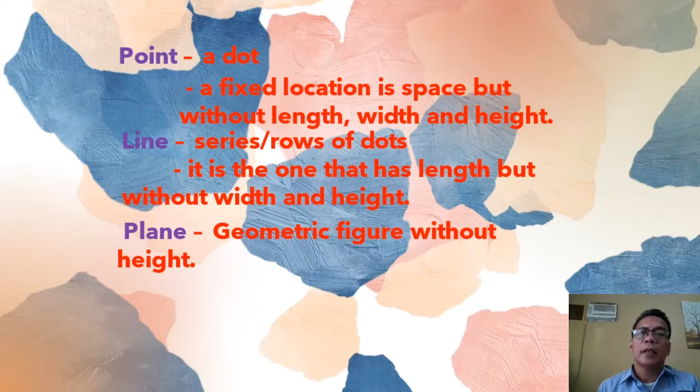What is a point? Point is a dot, as well as it is a fixed location in space but without length, width, and height. Line is a series of dots or rows of dots connecting to each other. It is the one that has length but without width and height. How is it related to plane? It is a geometric figure without height, meaning it has width and length.

So this is the first thing we will discuss today. I will show you the difference between the three in this next video.

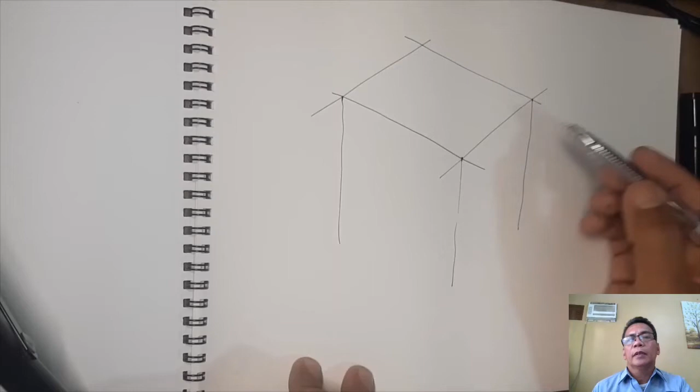So in sketching the isometric box, you need to sketch it using a thin line. Now, you would notice that I am sketching the top view first, then followed by the front view image of the box, and then the right side view. Now, the difference in sketching the technical drawing and the one used by an artist is...

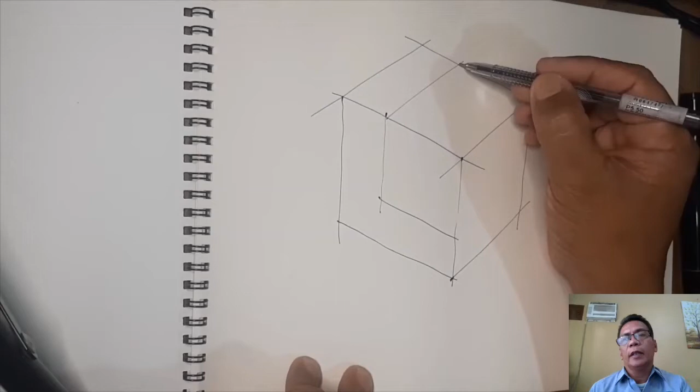In technical drawing, you need to draw a construction line. In artist sketching, the lines are repeatedly done, so it's entirely different. You would notice that I have used a thin line in constructing the object, and then after completing the image of the object, what comes next is the darkening of the visible edges.

I'm getting old. It's almost done.

So we have already come up with the image of the object represented by the heavy lines. So we have already finished the object.

So the next thing that we have to know is what are the dimensions of an object. Particularly, we need to understand that the object being visualized is a three-dimensional object.

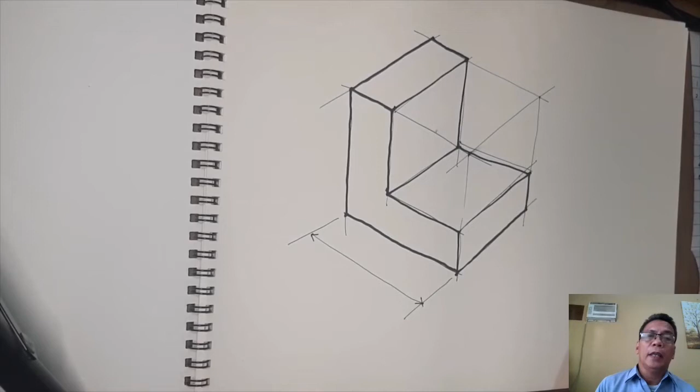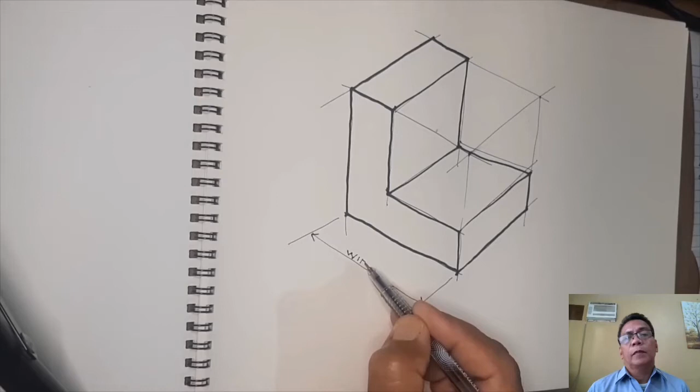So the first dimension of an object is what we call the width of the object. It is represented by W, and it is being measured from the left side to the right side of the object.

The next one is the length profile of the object. The length is being measured from the front view to the rear view.

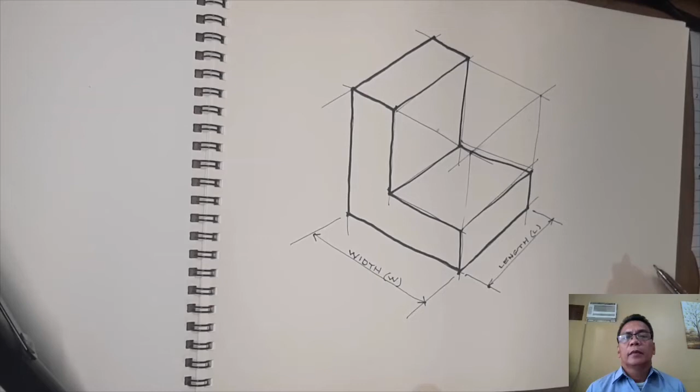The last one is the height of the object, which is being measured from top to bottom. So those are the three dimensions of the object.

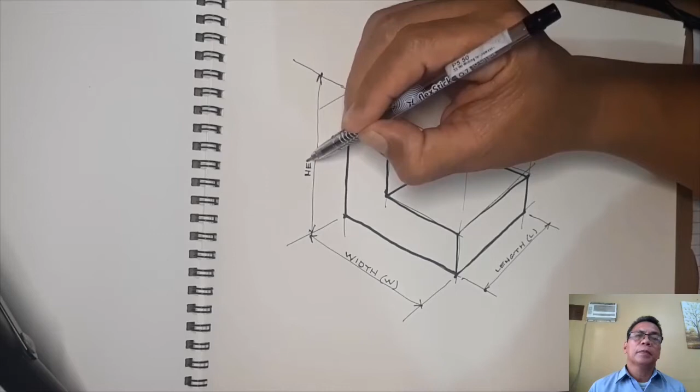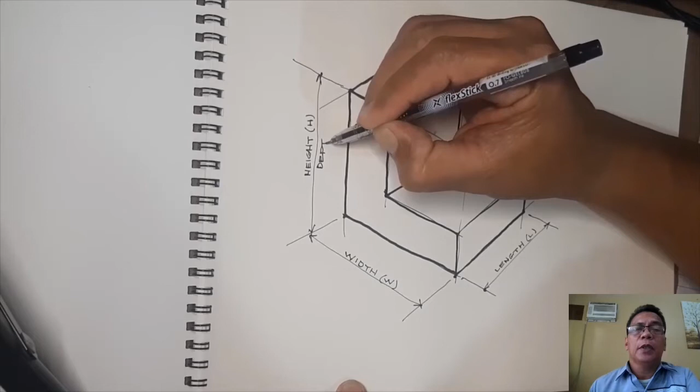Aside from being called height, it also refers to the depth of the object, or D. So we have completed the three dimensions of the object, namely the width or W, the length or L, and the depth or D.

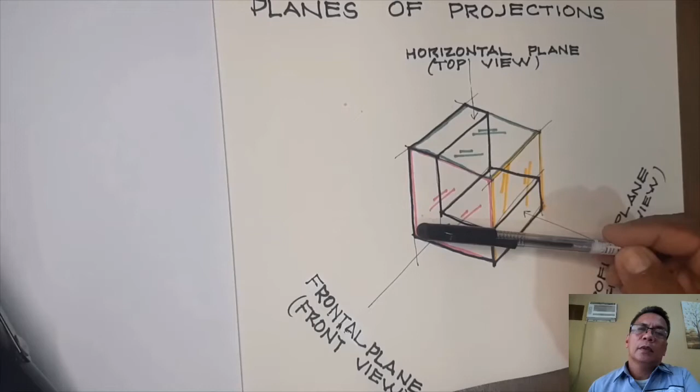So the next one is the planes of projection of the object. The horizontal plane happens to be the top view, and the frontal plane happens to be the front view of the object. So imaginarily, we have those three planes. Then the profile plane is the right side view.

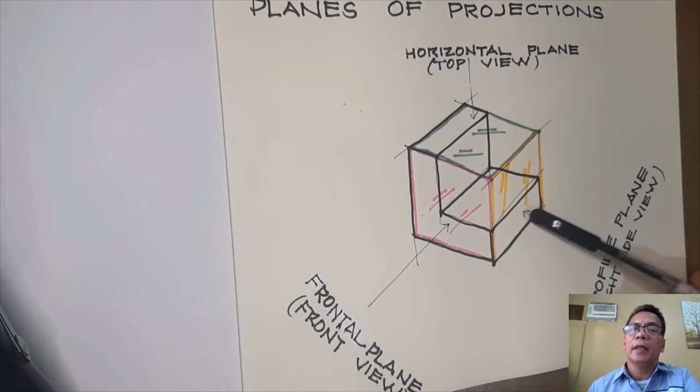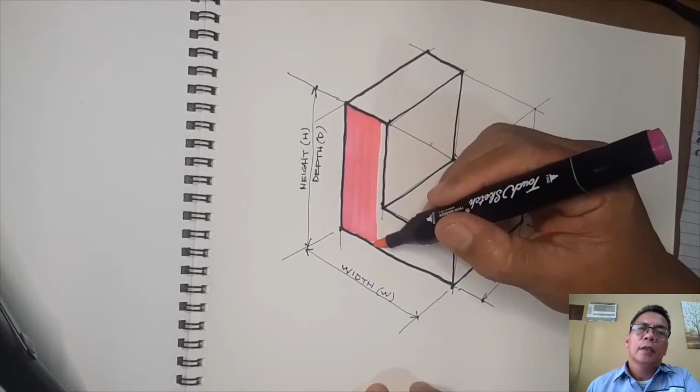Okay, so to identify which one is the top view, which one is the front view, and which one is the right side view, we are going to color the profiles of the object, beginning with the front view.

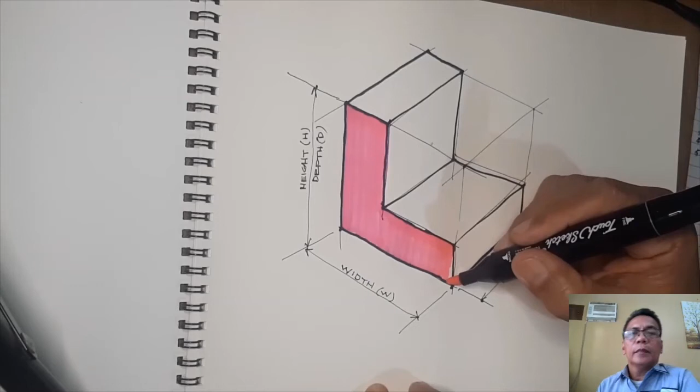So we colored the front image of the object pink, followed by coloring the top view of the object, or the horizontal plane.

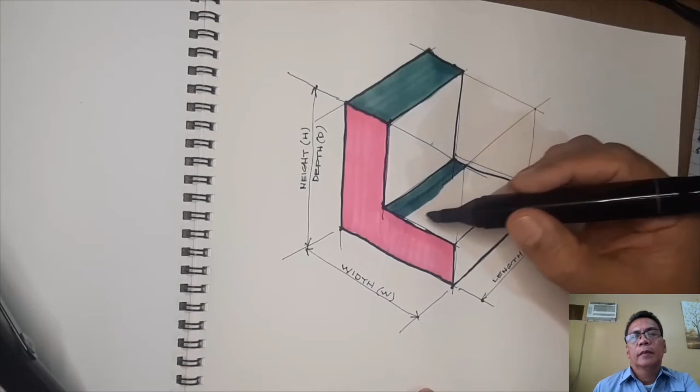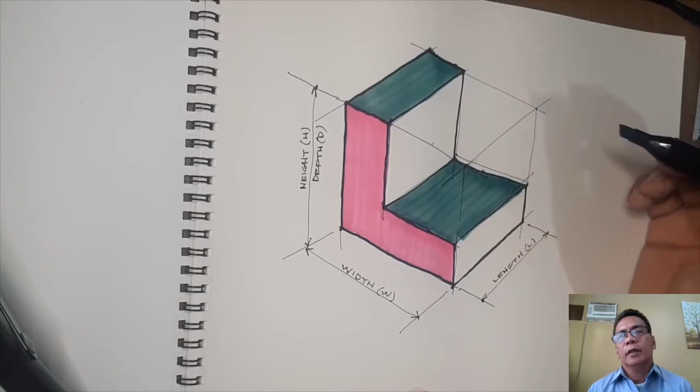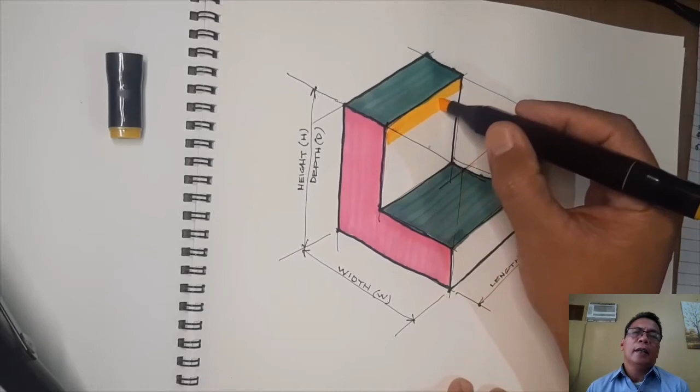So the reason why we need to understand this, why do I have to discuss this instead of mechanical drawing directly? Mechanical drawing is given only when you already know the image of the object and how to connect those different intersections. It is hard for a person to understand the difference between the point, the line, and the plane.

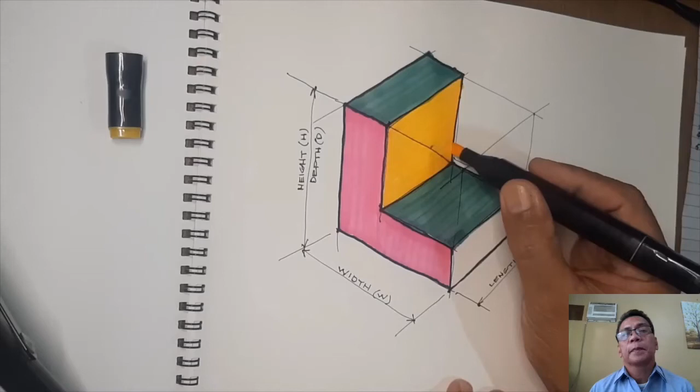So in this particular image, you would notice the angle of perception of an individual from three different planes of projection. We colored the front pink or red, the top green, and the last one, the right side view, yellow.

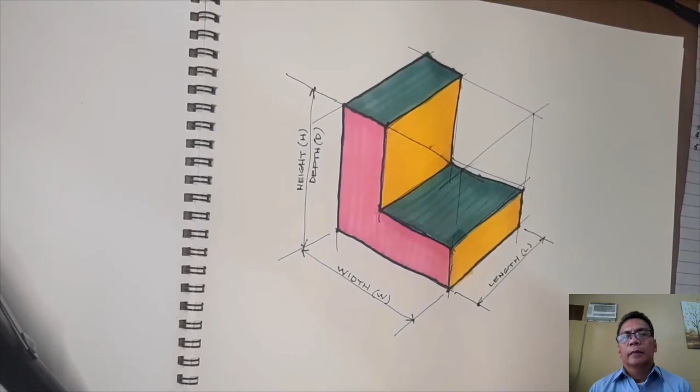Okay, so we have completed the dimensions of an object in color.

So appearing on the object, you would notice that the height, the width, and the length represent each view of the person observing it. So the width is only available on the front view and the top view.

The height of the object can only be visible on front, right side, and left side views. On the top view, you will see the length of the object and the width of the object, not the height. So there are different situations, different angles, and different perceptions depending on the location of the one observing the object.

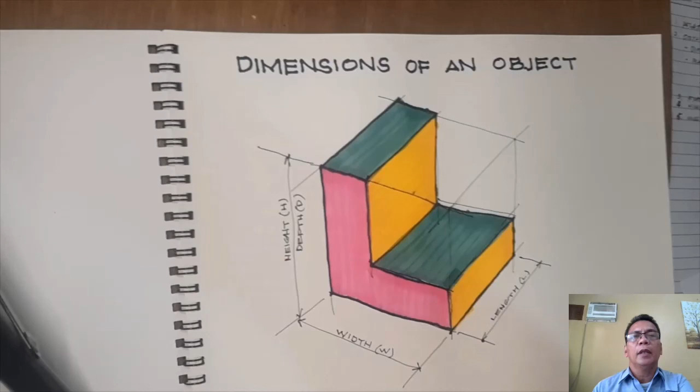So for this time, we have already discussed the point, the line, the plane, and the proper sketching down to the planes of projection, namely the horizontal plane or top view, the profile plane or right side view, and the frontal plane, which is the front view of the object.

So next time we will be discussing the orthographic drawing and some relevant missing views and missing lines.